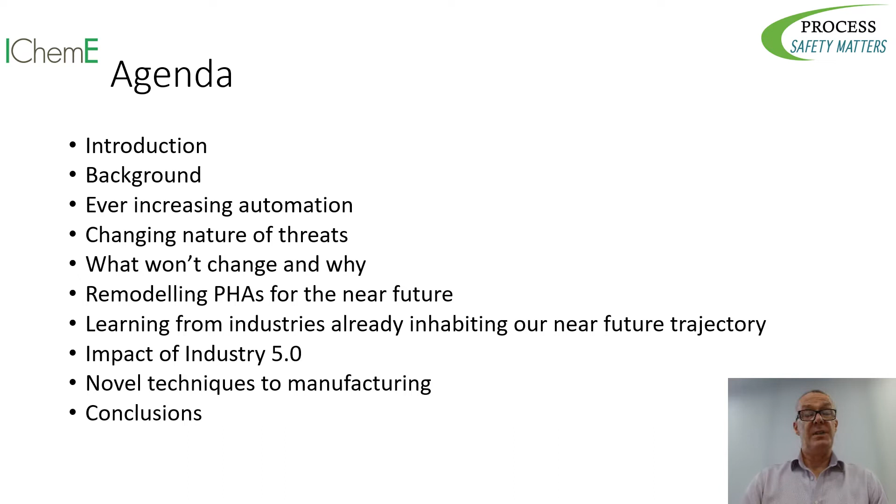I am a chemical engineer who graduated in 1986 from the University of Edinburgh. In the following 25 years, I worked in a variety of roles: process design, commissioning, training, sales. In 2011, I decided to try to become a HAZOP chair, and partly due to the backfilling requirement for HAZOP chairs caused by the measures taken by BP following the Deepwater Horizon disaster, I was successful. Since then, I have chaired over 100 PHAs, mainly HAZOPs, and developed several process safety training courses, presenting them internationally, both physically and remotely.

In 2016, I started writing a process safety blog, currently number 80, some of which contemplated issues which were, in my view, likely to arise in the near future. I started to think that there may be some benefit to collating these ideas and subjecting them to informal peer review. I sent an abstract to HAZ32 and received the response that the technical committee would like more granularity before deciding. This prompted me to reach out to around 50 people in my network, whom I respected, to set up a working session to critique and flesh out some of the ideas.

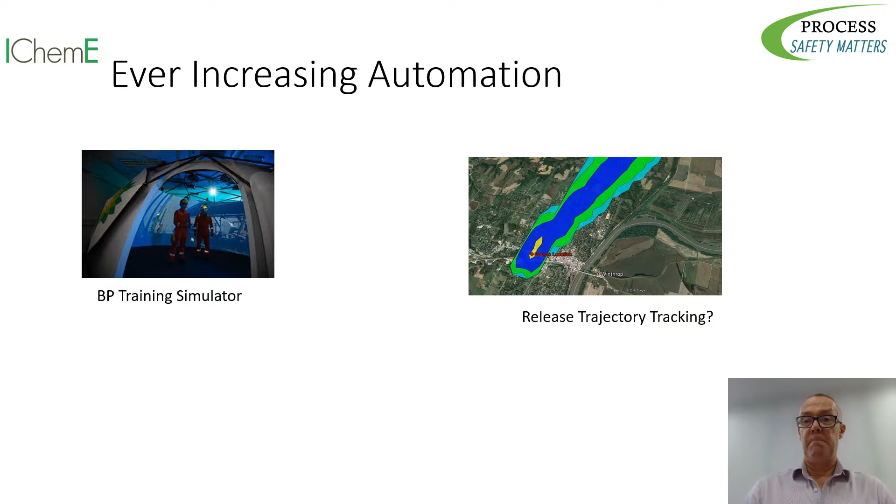Secondly, intelligent cameras to track releases and predict their trajectories, providing operators with intervention in real time. Thirdly, shared databases such as Fertilizers Europe Incidents Database, which addresses one of the 5 CCPS 2020 vision tenets, enhanced application of and sharing of lessons learned.

And linked to that, fourthly, online tracking, accumulation and interpretation of operating data from identical or similar plants within a company, which can then be transformed into an agglomerated response. This would work well where a company runs multiple plants based on the same technology, e.g. refineries or fertilizer plants.

We then come to the changing nature of threats: cybersecurity, man-machine interface, new processes and threats. Number one, operators in parts of the world which perceive themselves to be at elevated risk of terrorism are developing detection and reaction systems to prevent unit operations, plant or facility control systems being hijacked.

Number two, the trajectory of high hazard processing industry operations has been for ever decreasing man-machine interface, at least when we talk about actual plant. The number of plant operators employed per ton of product produced has dropped rapidly in the recent years. This trend will probably continue through 2030. At the same time, plant equipment will evolve. This means that traditional team hierarchy will become less effective the further we move into the future.

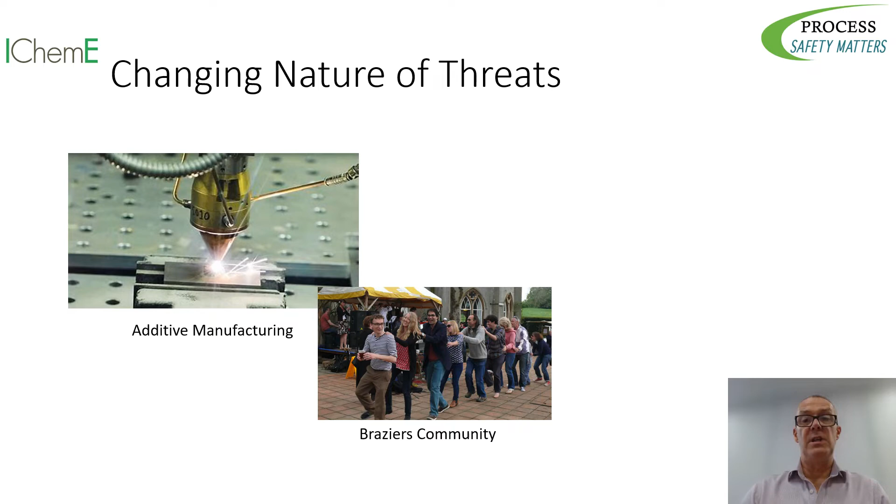Novel technologies such as nanotechnology and their associated products are exciting and can drive future growth. However, the associated risks, negative externalities, may not be uncovered until the industry has become well established. This has been previously demonstrated in asbestos being a carcinogen, CO2 released being associated with global warming, cigarettes leading to lung cancer. An example could be bacteria killing non-smelling socks. Seems like a great idea, but what if negative externality in the future could be upsetting an ecosystem balance?

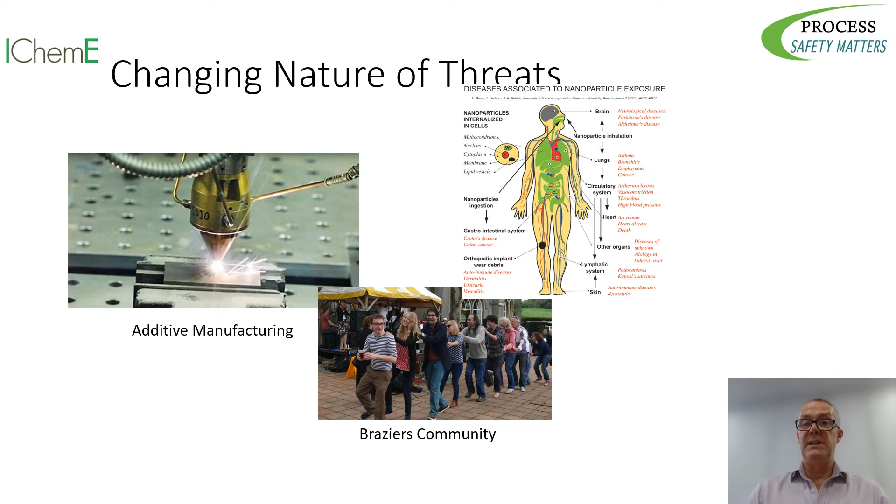The development of the nascent industry framework could incorporate tenets from the South African Truth and Reconciliation process, where punishment for apartheid-era crimes was commuted in exchange for openness about them, and that could be helpful.

And finally, recent increased interest in manufacture of hydrogen is welcome but fraught with scale-up challenges. These, ironically, may be pronounced where this is attempted by incremental technology stretch rather than starting from scratch. The development of technology stretch management of change would address the subtle risks involved. An example could be that blending small amounts of hydrogen into natural gas used for domestic heating seems practicable, but you wouldn't want an upset to lead to high H2 concentration leaking domestically and accumulating in the roof of a customer's house.

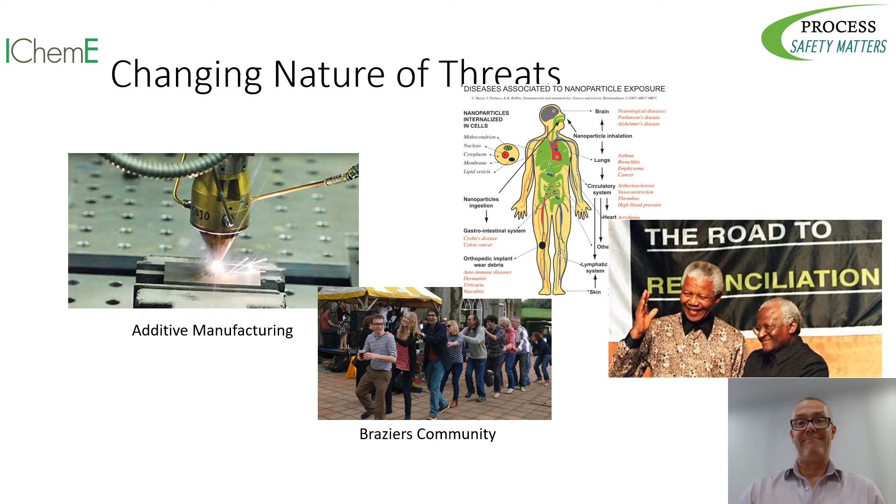So now let's look at what won't change and why, including the ongoing need for curious, creative, communicative and empathic professionals. In his book Superminds, Thomas Malone, director of the MIT Center for Collective Intelligence, defines three key drivers of optimal group performance: social intelligence, equal contribution, and maximum female participation. Evidence is starting to emerge that remote HAZOPs improve equal contribution by, for example, encouraging virtual hand raising and chat contributions. Should we push for a minimum threshold of women in future high hazard plant operating teams?

Secondly, in a high hazard plant process environment, any emerging incident has the potential to generate panic, which has a detrimental effect on decision making. Field operators could be furnished with crunched data suggestions for decision making as the crisis unfolds, perhaps with a short override window before automatic implementation.

During commissioning and initial operation, the plant is likely to be extremely dynamic, stimulating operator attention. However, after several months, this is likely to calm, increasing the risks of operator complacency as less and less happens. Consider using AI to overtly simulate deviations on the real plant to counter this.

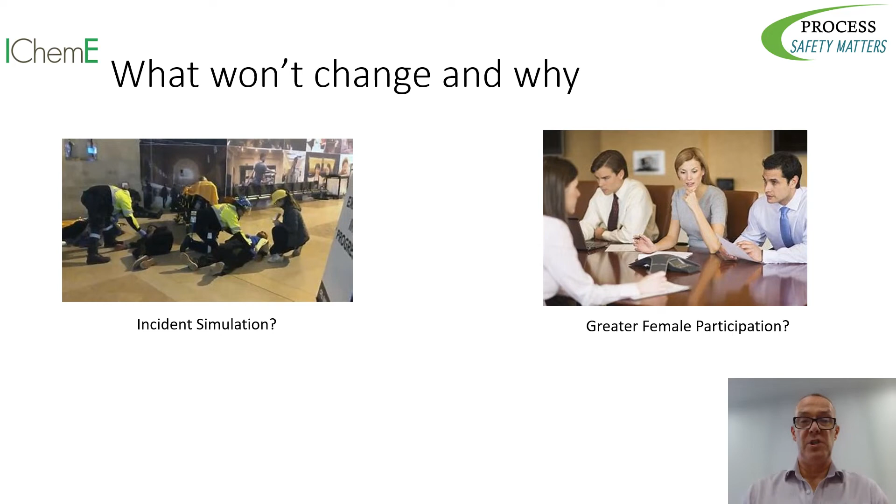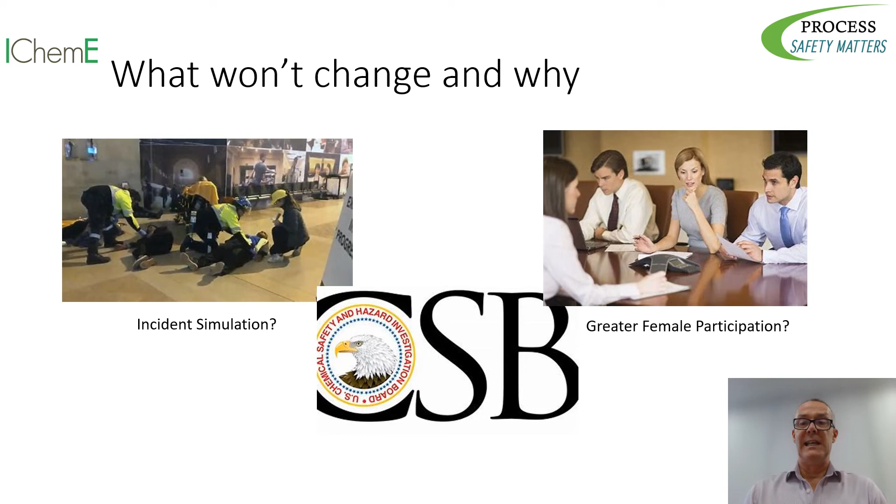In an increasingly media fluid and flexible world, however, regulators may also absorb feedback from industry and communicate to governments to influence its decisions. An example of this was the work that the US Chemical Safety Board undertook in the wake of a 2012 process safety incident at a California refinery. The study recommended revisions to the state's PSM, Process Safety Management Regulations, emphasizing the benefit in terms of worker and neighborhood safety and welfare against a small cost, $0.004 per gallon. The associated legislation was passed in 2017.

Remodeling PHAs for the near future, leveraging advances in AI without relying upon them. Firstly, compensating for the benefits of in-person HAZOP, reading the room, proximity, etc., to be replicated by applying VR to eliminate downsides: travel cost, time, and associated environmental impact.

Secondly, comprehensive root cause analysis with all steps from cause to consequence for relevant MAH examples available to counter the bold assertion that our plant is different from the one in which the incident took place. It would be countered by: that's true, but steps 2, 3, and 6 of the incident's root cause are the same, and therefore learning can be taken.

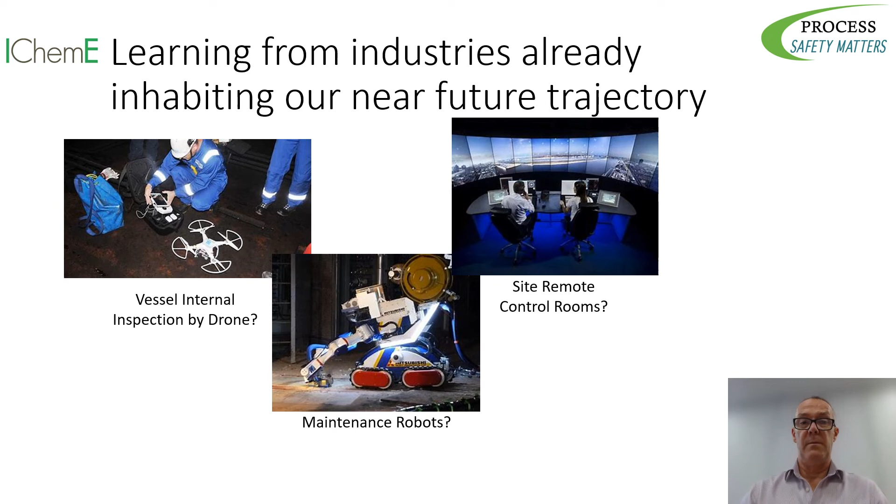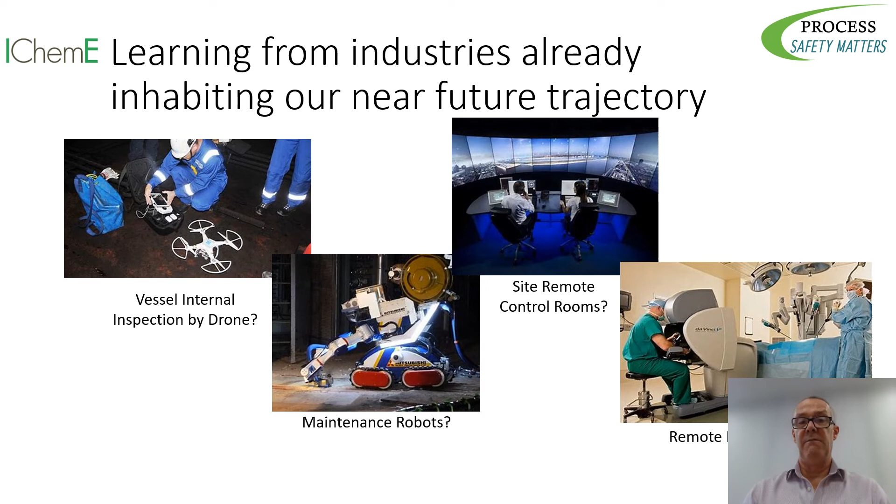The impact of Industry 5.0, the Internet of Things, personalized manufacturing, man-machine interaction, industrial upcycling. Sophisticated machinery to diagnose and fix themselves, personalized manufacturing, man-machine interface.

Secondly, humans are inherently competitive, while HAZOPs are all about cooperation. AI has advanced so much since the inception of HAZOP 60 years ago, 2 to the power 25 according to Moore's law, so it should now soon be possible to develop a system which will take an existing or new design, apply HAZOP rules to it to identify gaps and address them optimally. What if we did that in parallel to an actual HAZOP and then compared the outcomes?

Firstly, HAZOP team competition would be encouraged to generate an outcome which resembled that of the AI, essentially competing with it, and then have the power to override AI outcomes which jarred significantly with the consensus of the team. One example of this could be that a HAZOP AI would likely dismiss any double jeopardy causes, but the team may reinstate some based on their experience.

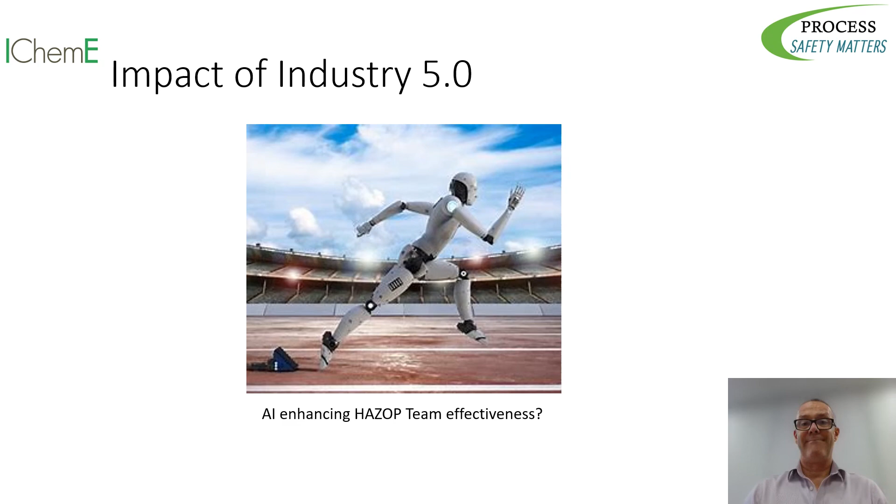Novel techniques to support manufacturing: cloud computing, next level robotics, augmented reality. Nudges to generate safer outcomes. People have a strong tendency to go along with the status quo or the default option, Richard Thaler said in his book with Cass Sunstein, Nudge.

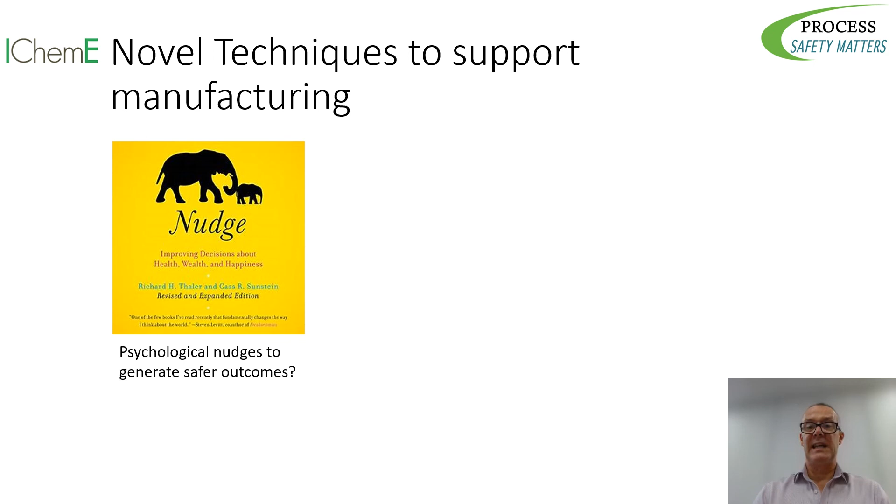Some high hazard processing companies are already working with robot dogs to assist in the critical phases of storage tank emptying and inerting. Any remaining operators will wear technology which will enhance their senses to recognize modern risks, enabling them to see into operating rotating equipment. And finally, the use of increased and more powerful AI to make routine decisions could free operators to concentrate on more exacting and interesting tasks.

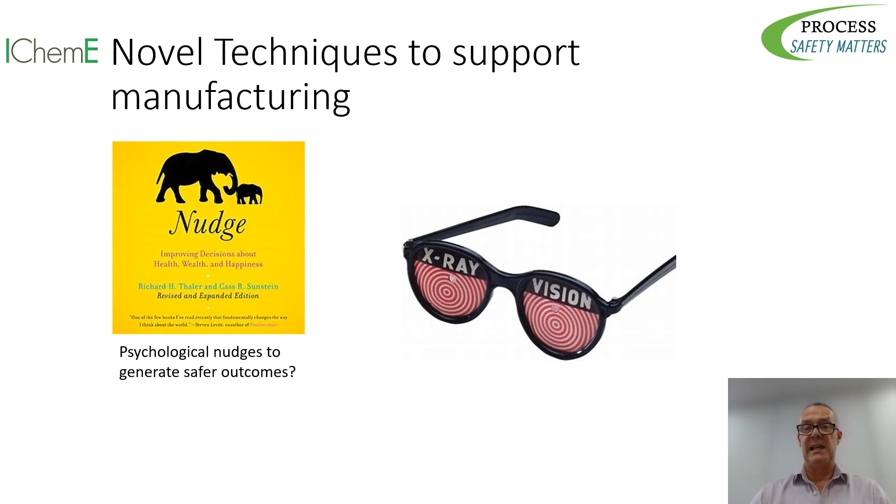We have repeatedly risen to the process safety challenges of the past two centuries. We are now in an era of rapid and varied change: ever-increasing automation, both hardware and software, changing nature of threats, cybersecurity, man-machine interface, new processes, new threats, the impact of Industry 5.0, the Internet of Things, personalized manufacturing, man-machine interaction, industrial upcycling, novel techniques to manufacturing, cloud computing, next-level robotics, augmented reality.

I invite you individually to choose and champion one aspect of this evolution. Mine may be competing human AI HAZOP teams to improve outcomes. What would yours be? Together, we can identify and address the process safety impact of this challenge.